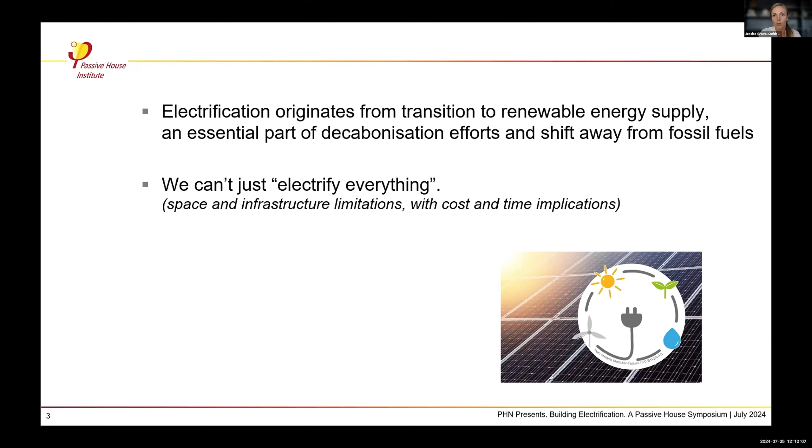So we had to talk about electrification, but more specifically, we had to talk about buildings and electrification. How does the trend for electrification influence building design? Or ask the other way around, what role do buildings play in this important journey of electrification?

There's always the building design side in terms of how much energy we need, what kind of systems we use—and there's the big trend towards heat pumps in this context. There's also the side of electricity and energy supply, which in the context of buildings is typically and most dominantly PV.

When I was preparing this presentation, I read one of the most recent newsletters from the blogger Lloyd Alter, and I couldn't have picked the words better, so I chose to use his quote. He says: if we're going to have a chance of electrifying everything and running on renewables, we really have to reduce demand and shave the peaks. Those are really the two crucial aspects it comes down to—crushing those peak loads, bringing them down, and reducing the need for electricity overall.

This is where Passive House and EnerPHit really come into play, because they address exactly these two topics: bringing down the peak loads and bringing down our general energy demand. I'm going to dive into a bit more detail on both, kicking off with reducing energy demand first.

The most obvious point here is that we have limitations in terms of space. How fast and how much renewable energy can we actually build up in order to provide the same energy currently provided through other resources, mainly fossil fuels? That's a large amount of energy. Building a completely new infrastructure to provide that through renewables and electricity has to be limited, has to be reduced, otherwise this becomes absolutely unfeasible.

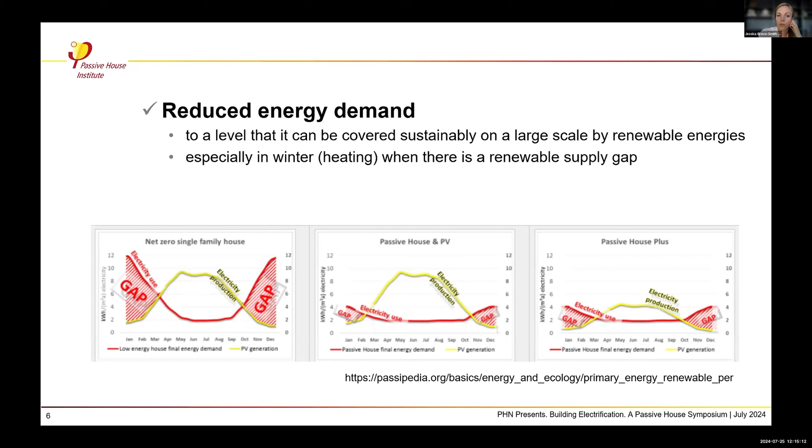So again, Passive House for new builds, or EnerPHit for retrofit, can really help with this, because they address bringing down the energy demand in winter, for example, for heating. They really, really bring that energy demand down.

So we can see, if I just get on my laser pointer, in the examples shown on this slide—on the left-hand side, it's just a typical net zero single family house. In red, we see the heating energy demand curve; in yellow, the production. So this is net zero, but we have that massive discrepancy between our supply and our demand.

Here we have the passive house example—you see how it really brings down that energy demand. With the same amount of PV, we're easily in a surplus; we can provide more to the grid and help cover some of those seasonal storage issues. Or if we have the same net zero goal, it means having to bring a lot less PV to the grid. The other topic to speak about is our peak loads.

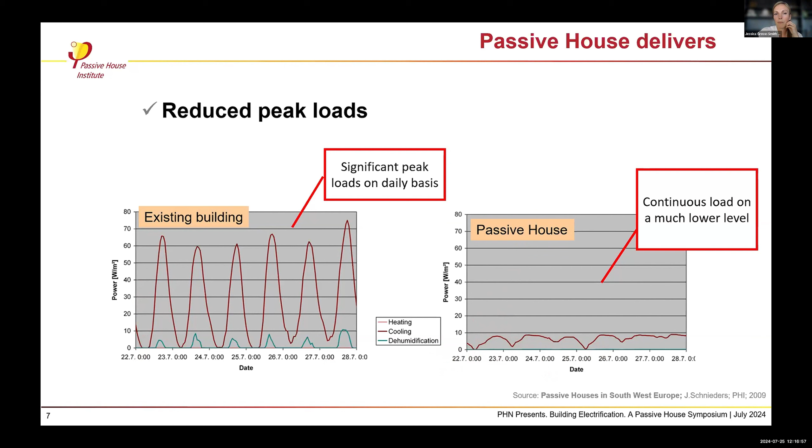There's an extra benefit that comes with this, which is really important to point out. Passive house buildings, energy efficient buildings, have much more inertia, right? They're much slower in a way to react. They're not so sensitive of having to get the right amount of heating or cooling at a specific time. So that gives them resilience.

So a really important aspect to all of this. It also means that we have much more flexibility in terms of actually using our buildings as storage as well, because it doesn't matter so much when we introduce the heat. It can be shifted by a few hours, maybe even a day, and still you're maintaining comfortable conditions within the building, which can really help to stabilize and run the grid.

So shifting gears a little bit, what I've spoken about so far is reducing our energy demand and reducing our peak loads. Both of those are fundamental and core parts of the passive house definition of what passive house has always been about, in addition to the building physics and comfort requirements. But there's a second and kind of extra tier to all of this.

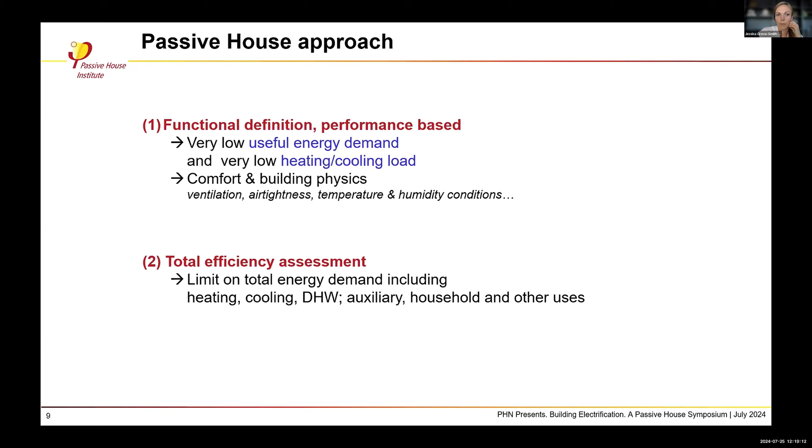And here it becomes a little bit tricky. This is where passive house has really developed a new solution to address the topic of electrification and renewable energy supply. Because the tricky question here is, what kind of indicator actually works well for that total energy assessment? Conventionally, nowadays, and in the past, we've become used to using indicators such as source energy, which is fossil fuel based, or CO2 equivalents, which are both valid. They both have their historical context. They're both really interesting factors, but neither of them address the topics of...

...electrified renewable energy grid. Neither of them incentivize in terms of we need to make sure we reduce our demand for renewables overall, and neither of them address the topics of seasonal mismatch or of peak loads. So an alternative is really needed in the passive house world, but also beyond, in terms of what tool can we use to guide our building design.

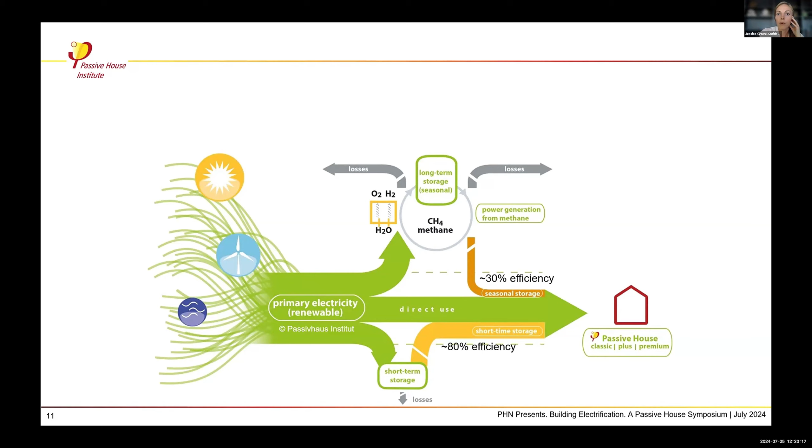And this is where PHI, a few years back, 2015 now, so almost 10 years ago, developed a scheme of PER. We call it Renewable Primary Energy, PER. And PER is, from its methodology, similar to kind of source site energy conversion, but fully in the context of a renewable energy supply.

The PER conversion factors we use convert from actual site energy by the building to the PER demand. They reflect how much renewable energy you'd have to feed into the grid to match your site energy demand on the building, taking into account that you can't avoid losses along the way, either through battery storage to cover a couple of hours or days, or longer-term storage for seasonal needs.

There are different technologies being discussed for this. I won't dive into the details of why we chose the methane solution shown here—it doesn't really matter, because overall the efficiency of these seasonal long-term storage solutions is only about 30%. So you're losing a lot of energy for anything that has to be stored for a long period of time.

So this is the PER scheme that we've developed as Passive House Institute. The idea is that you have weighting factors that give you an indication for your building design in terms of your amount of renewable energy—what is your sustainable use of renewable energy resources.

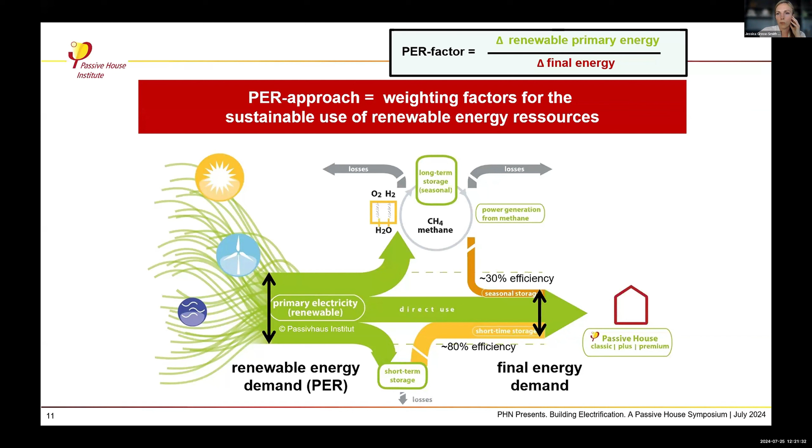It very quickly became apparent when we were doing the analysis that the actual timing between when the energy demand occurs and when renewable energies are available is the driving factor for all of this efficiency of providing electrification or providing renewable primary energy.

We did a lot of simulations worldwide for different building scenarios and different efficiency levels to derive these PER factors. In the end, what's been implemented is that we have different PER factors for different locations, depending on climate and renewable energy availability, but also different weighting factors for different uses of electricity. So your efficiency is going to be much worse for heating, where there's a huge mismatch between what's available and what you need, versus cooling, where quite often PV is available at the time you need it.

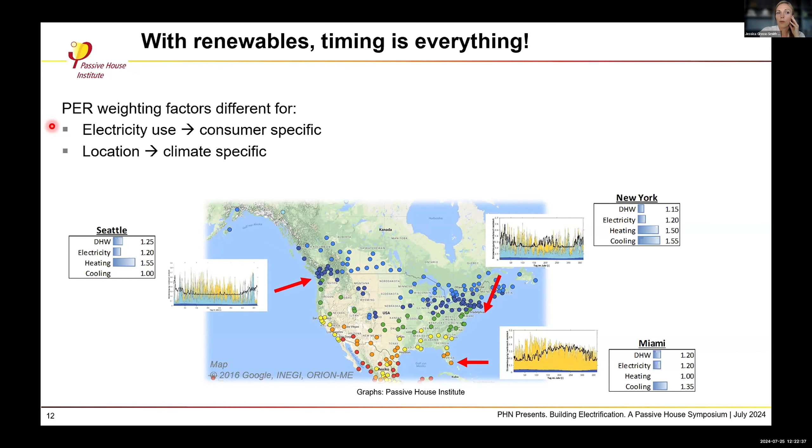So all of these factors are integrated into PHPP, the Passive House Planning Package, and they become part of the climatic boundary condition for your energy modeling—giving you a methodology for localized, regionalized electrification or decarbonization. How do I locally optimize my building to match up well with a renewable energy supply?

So far I've spoken about electricity in terms of PER, which is the main energy carrier for renewable energy supply, as explained, depending on climate and consumers. Obviously, in reality, not all buildings are going to electrify immediately, and we also have to look at how we rate other energies within the PER scheme. It's beyond the scope of this presentation, but I wanted to briefly show and point them out because it becomes relevant for the discussion of how PER guides design compared to existing source energy ratings.

Basically, in the PER scheme, we rate all energy carriers as if they were fully renewable. So gas, for example, becomes rated within the efficiency of it actually being power-to-gas—gas created originally from renewable electricity. I'm happy to answer more questions in the chat or afterwards about this.

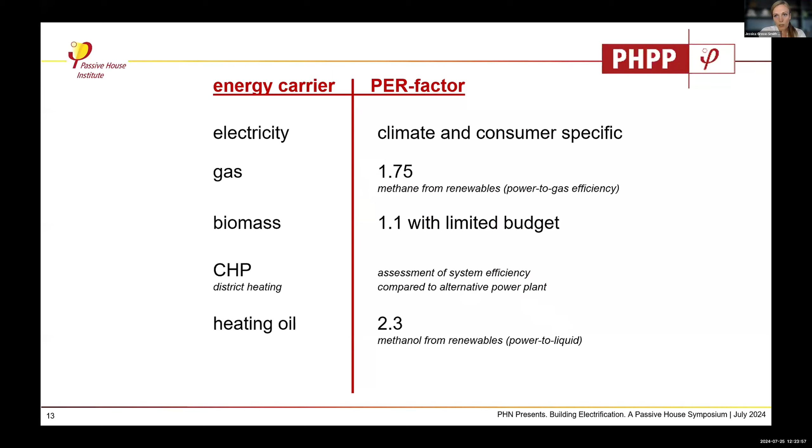I'm going to skip ahead in terms of time and actually dive more into the implications of what PER does and how it supports us in decisions about electrification.

What we see here is, in the context of the US and Canada, the source-site ratios taken from the Energy Star portfolio. You can see the factors are quite high for electricity grid purchase and quite low for fossil fuels typically used like natural gas or fuel oil. Whereas in the PER scheme, the factors for electricity vary depending on use and climate between 1 and 2, while the factors for gas and oil are much higher—1.75 for gas and 2.3 for oil.

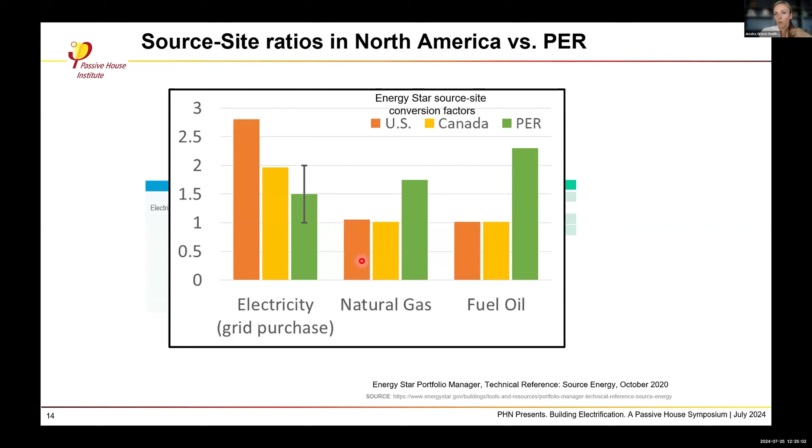This is the same information, but shown as a graph to make it visually easier to understand. Orange is for the US and light orange for Canada. You can see that in the PER scheme, electricity is rated much more favorably, whereas in the current source-to-site schemes, it's the fossil fuels that get encouraged and incentivized by these weighting factors.

So it encourages you away from the gas solutions, away from the fossil fuels, towards your electrical solutions, ideally heat pump solutions. That's what PER implies when you use it as part of your building design and choices for systems. PER is really important and applicable generally, and we'd like to see it pick up also outside of the passive house scheme.

To really make these aspects visible, and the importance of energy efficiency more integral of the whole building design processes. In terms of the passive house quality assurance, PER is applied in terms of the categorization of 3 certification tiers: Passive House Classic, the traditional one that we know, and then Plus and Premium, where the fundamental requirements are the same in terms of very low peak loads, very low energy demand. But on top of that, for the higher tiers, we're calling for an increased overall efficiency, so lower PER demand, and a certain amount of renewable energy generation.

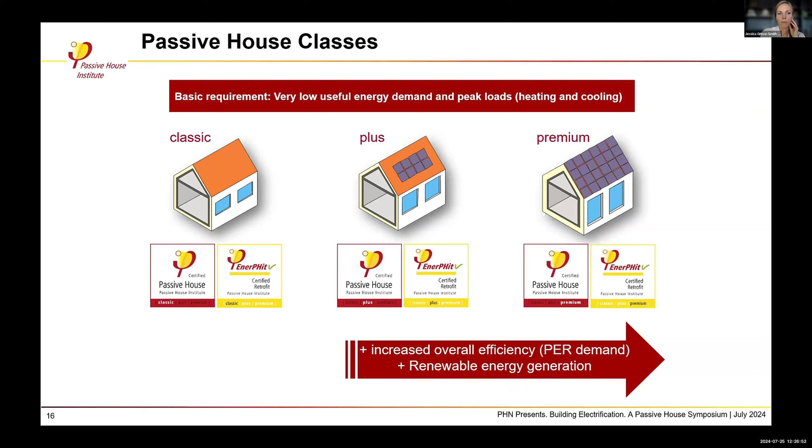Renewable energy generation is obviously the other side of this very same coin of electrification, and a very commonly used goal here is net zero. It's a simple and attractive concept. I get it, I understand it, but it can be very misleading. It ignores all of those aspects that I spoke about earlier regarding peak loads, regarding looking at seasonal storage and losses, and just leaves utilities to deal with these kind of problems.

Now, this is all a very big topic, and I realize this has been a very quick run-through, so I just wanted to point out a few resources to dig a little bit deeper and learn more about the PER scheme. The go-to to get started is Passipedia, and there's a landing page there for PER that'll take you through a lot of things I've spoken about, but also more in-depth information on how we develop PER and some more examples of how this gets implemented.

Not all passive house and EnerPHit projects nowadays are fully electrified, but it is certainly an increasing trend that we're seeing. We'll hear about some really exciting trends and some really great projects from the US context later today that I really look forward to. For those of you who are not yet familiar with our online passive house database, I encourage you to take a look.

It's a fantastic resource to get inspired from projects that have been implemented, and you can use this to find projects of most interest to you by using the filters, for example looking for Plus or Premium passive house or EnerPHit projects, or searching terms such as heat pump, which will point you toward projects that have implemented heat pump or electrified solutions.

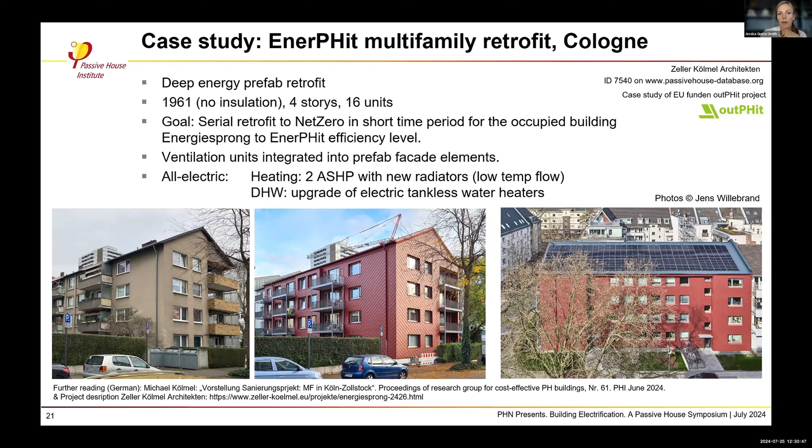The numbers show that they do achieve net zero overall over the course of the year, but only due to the really high efficiency levels to the Enerphit level that were implemented. It's a certified Passive House Plus.

As I mentioned, we approach that differently in the Passive House certification scheme. We don't do net zero. We don't try to match your absolute energy production with your demand, but we rate them independently.

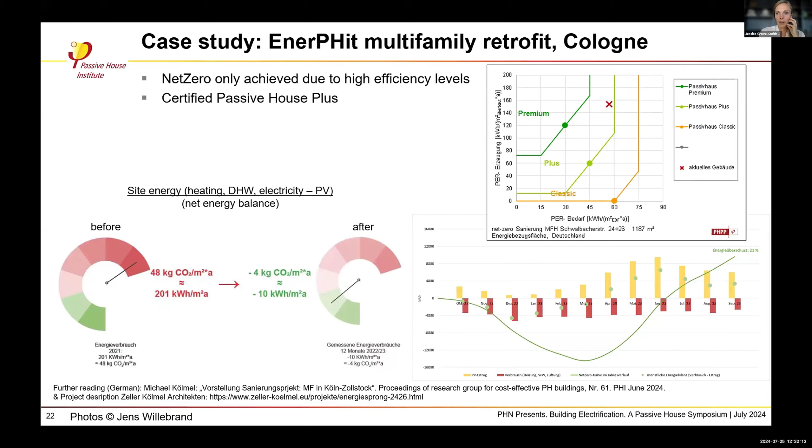There's a lot more to talk about, but that brings me to the end of my presentation. I'm excited to hand it over to the next speakers and learn about their projects. As a core kind of message and takeaway, I think I just wanted to highlight that energy efficiency is really an enabler, but more than that, it's a prerequisite for sustainable electrification. And Passive House and EnerPHit can really set us up and leverage those challenges and set us up for success.

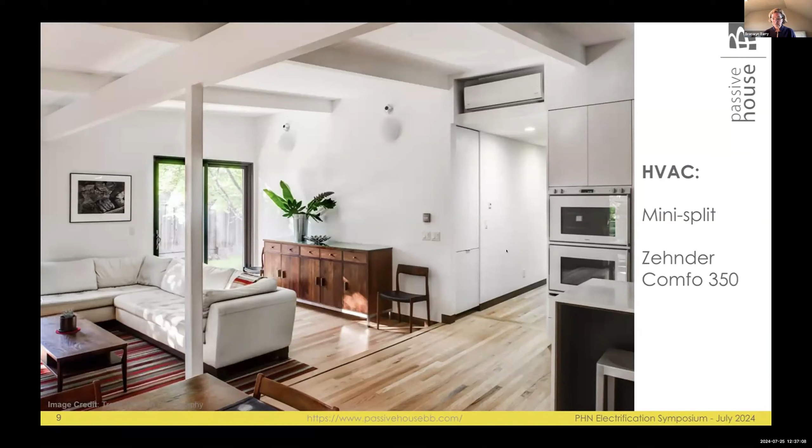For this project, remember, this is a wall-mounted mini split, just under 2,000 square foot home, heated and cooled with just that single split unit. Ventilation supply all through these two nozzles into the plenum living space.

This is an image where you can see we did still have a gas cooktop in this home, and the only reason we put it in was because the clients had already bought it before we got to them. They also had a gas water heater, which we reinstalled because it was still in good shape, with the caveat that it would be replaced at end of life with a heat pump water heater.

And I understand it has already been replaced. And finally, I'm going to catch up with the third project in Sunnyvale.

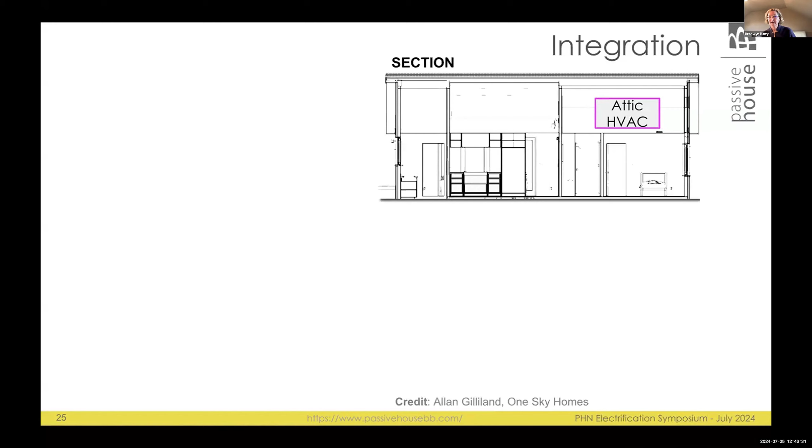In terms of the HVAC layout, again, Allan sort of went and used the same tricks that he'd figured out in Alamo, integrating the HRV and heat pump ducting to really simplify the mechanical system distribution layout.

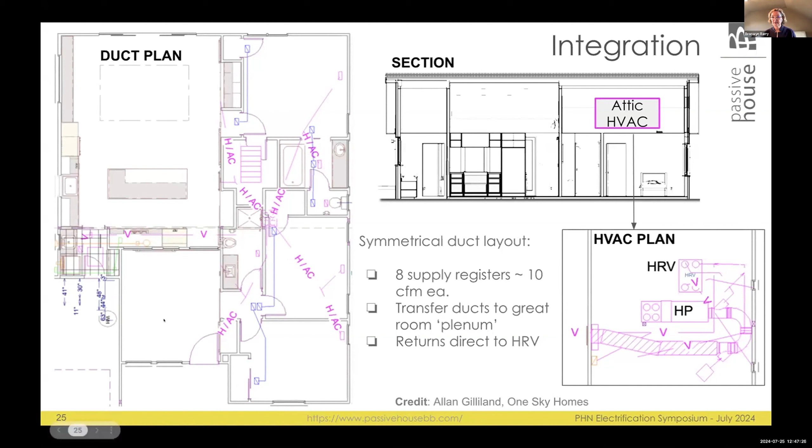You can see again in the duct plan, this was the vaulted spaces here, the living room spaces. Our HVAC is sitting in the attic above the bedroom spaces here, and 8 supply registers, very even, again, balanced layout. You can see jump ducts, making sure that the air pressure balance across these rooms is also kept balanced, and that the transfer to this living space plenum area can be effective and happen.

Again, supporting what Jessica mentioned in the definition of net zero, which has lots of fuzzy opportunities to be interpreted creatively, shall we say.

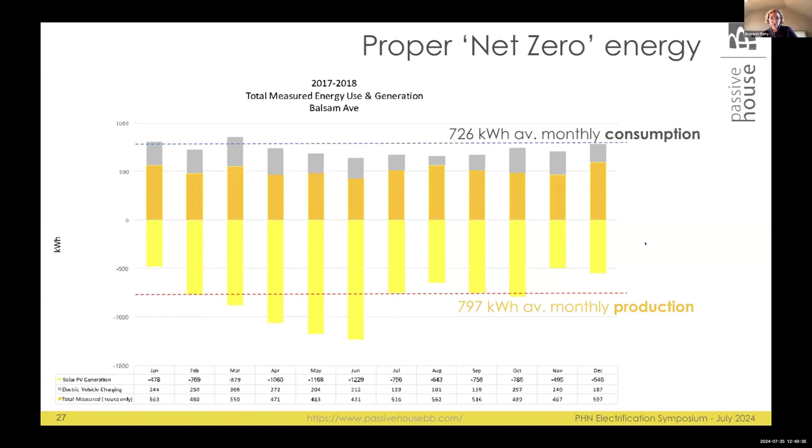So now that I've told you what I really, really want, like the Spice Girls, I'm going to show you that passive house in California is still an absolute no-brainer. It crushes the heating and cooling loads in all the climate zones that matter.

Part of this other CPUC report confirmed that my 2 passive house projects, which I presented on here, I was able to supply hourly monitoring data to them for over a 2-year period for both of these projects, which was then converted into a comparison between 5 Zero Net Energy homes in California in similar climate zones. So a pretty close comparison between passive house and not Title 24, but better than Title 24, so ZNE.

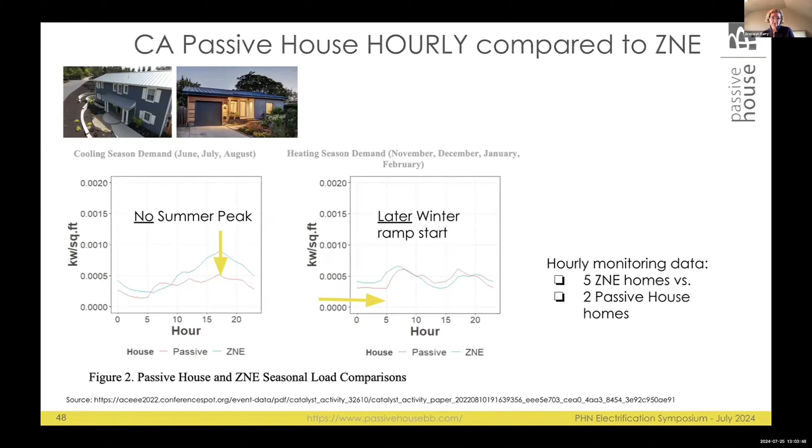Winter, there was definitely an improvement, a shift of the peak ramp-up rate of when passive house started to kick in. But in terms of winter, not significant ramp-ups compared to the ZNE homes, which were clearly doing a pretty decent job of keeping winter loads low.

I'm going to show you a little bit of my own home. I'm a passive house architect, been doing all-electric passive house projects since 2008. So I'm going to tell you a little bit about the why, how, what, and where, with the example of my Passive House Plus project.

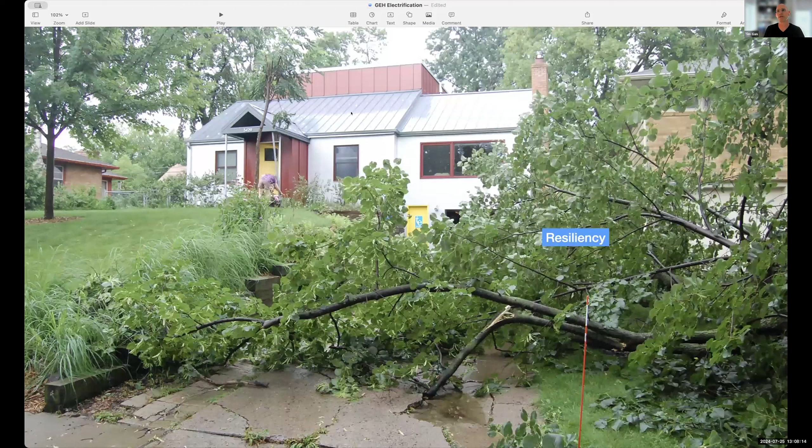Motivation: why would anybody decide to do this beyond the societal reasons we've already heard about today? For us as a family, it was really important that we do our part on climate change, so we didn't want to be part of the problem. Comfort, huge—we live in Minnesota, we have very cold winters, and code-compliant construction doesn't provide a lot of comfort. It's drafty, we have radiant heat loss, so we wanted out of that. And also resiliency—we have changing climate, more severe weather events, so we wanted to be in a building that can weather the storm, so to speak. The passive house is a great approach for that.

So we decided to build Minneapolis's first Passive House Plus, and I'm going to run you through how that all went. So why did we decide to electrify everything?

Well, it's climate neutral, so that answered our first request. It's also a universal fuel, something we need for everything, so it's easy to go with electricity because you can power just about any device these days off of it. We can make it on site—we have solar on the roof, which I'll show you in a minute. We can also build a backup and storage solution around it.

The heat pump efficiency was of interest to us. So the mechanical systems, as Bronwyn pointed out, there's efficiency here to be had. We eliminated all combustion from the home—there's reduced fire risk and better indoor air quality for it. We didn't have to pay for gas, plumbing, and infrastructure, so that's not even in the building at all. And for me as a geek, there's simple math here to track my consumption and generation—it's all kilowatt hours. That's another good reason to go with electricity.

A quick picture of our context here: we did a tear-down rebuild in Northeast Minneapolis, US climate zone 6, very cold, 8,000 heating degree days, with a design temperature of -31°C or -24°F. So my main concern here is heating, although we do have a cooling load just as well.

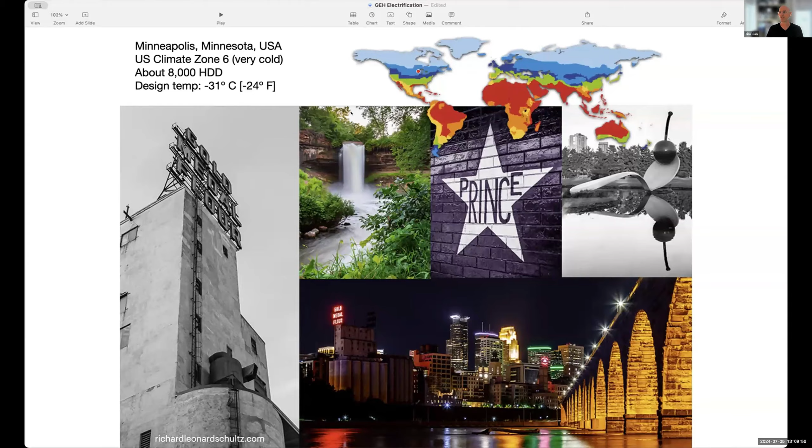Passive House Plus, as I talked about earlier, means we have renewable energy in the mix, and we did track the PER values. Won't do a deep dive on that today—hopefully we'll have another presentation someday where we can expand on some of these subjects.

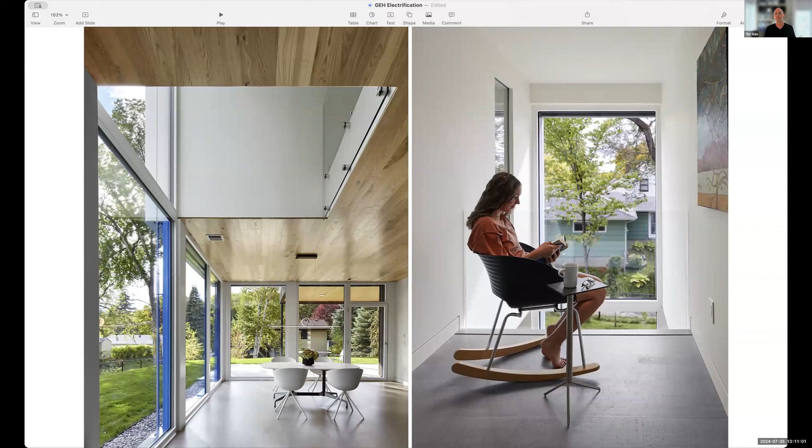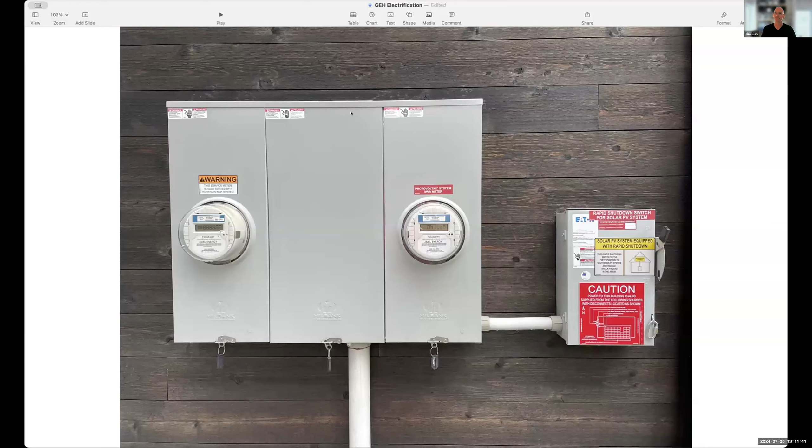Just a couple of impressions of the infrastructure. One thing that changes in this scenario is that we have the main service coming into the garage, and then the house has a sub panel off of that. I'll talk more about why we did that.

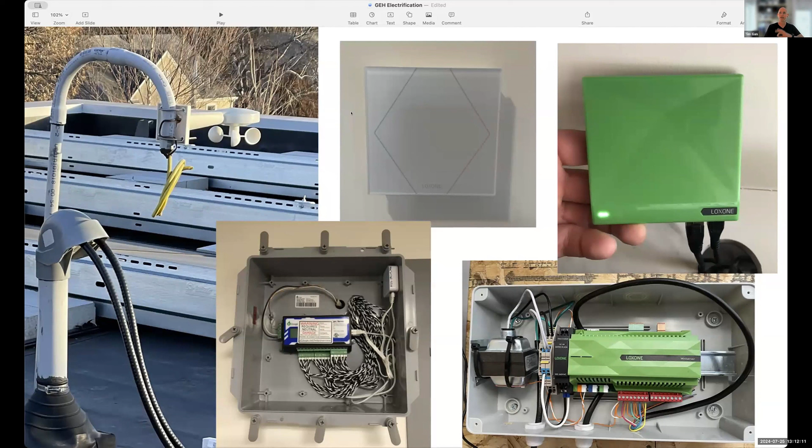We also monitor this, and that's important because I wanted to bring you some numbers today. We look at temperature, humidity, weather, indoor air quality. The whole thing is basically instrumented, and you don't have to do that, but for somebody in my profession that makes sense because we can learn from that. Here's some imagery showing some of the equipment we use for that.

So let's talk about the process real quick. What are the things we did to be able to do an all-electric passive house? The first thing is we rotated the building on our block 90 degrees from the building that was there to make the broadside face south. That makes the building a passive solar collector. That's a really important part of the strategy.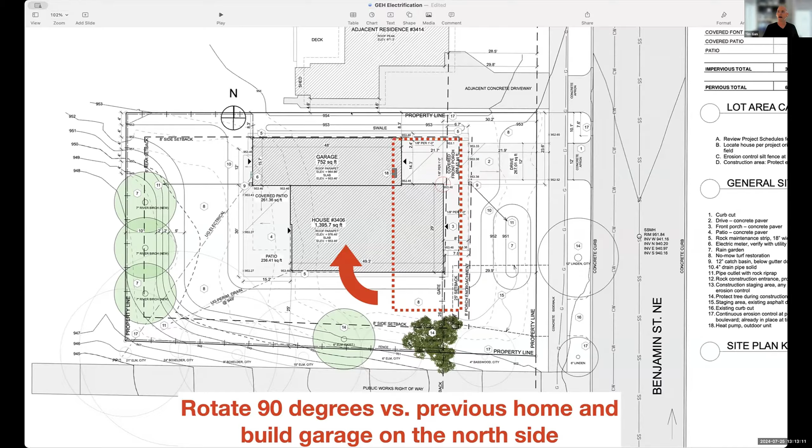Secondly, we made it a certified passive house. So the construction methodology, the R values, air tightness are all at the passive house level. This brings the peak heat loads and the overall demand down and enables the all-electric fueling of the building.

The next thing we did is we basically erected the back of the garage first. And as soon as humanly possible, we put the electric service in, subscribed to wind power, and we effectively built the entire building off of wind energy right out of the gates, trying to avoid any kind of generator or polluting equipment even in the use of construction. This also extended to our construction methodologies, but again, I won't be able to do a deep dive on that today.

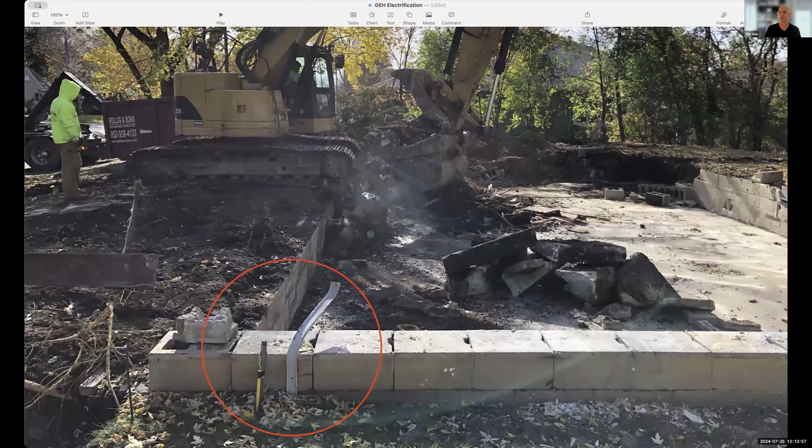With the demo of the old house, we removed the gas service. You can see the remnants of it right here. That was a bit of an upset for the gas company because they can't imagine a building without a gas connection in Minneapolis, Minnesota. And they also had no protocol for removing the service, which means that thing just got abandoned on my site. So somebody cut through it with that shovel, and the remnants of that are buried somewhere in my front yard, and that's where that story ends.

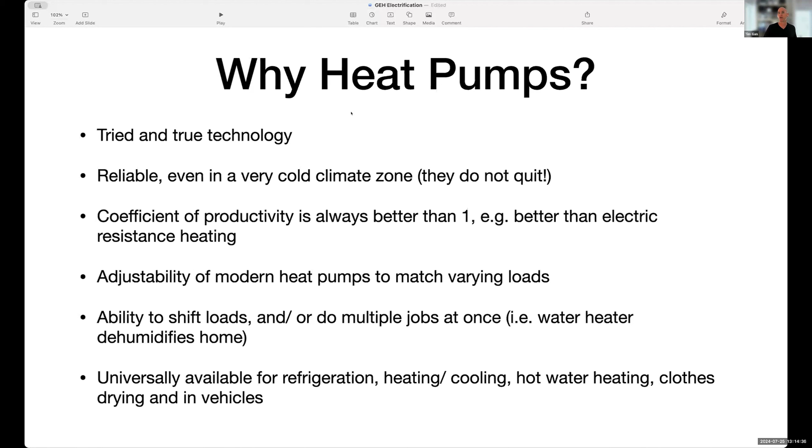Then we went for solar. We installed that within the first year on our roof, and with that we were able to go essentially all electric, and then install a bunch of heat pumps.

You don't have to read these slides here, I'll give you some pictures. One of the benefits of going all electric is we can leverage this technology, which isn't particularly new if you think about it. In refrigerators we've had it for decades. In my home, you find it in the refrigeration, the dryer, the heating and cooling system, that's house and garage, we keep our garage frost-free. You find it in the hot water heater you can see there on the right-hand side in that picture. And then also in the vehicles these days - they are also efficiently heated and cooled with a heat pump.

The reason we use heat pumps is it's a tried and true technology. It's been around the block. It is very reliable, at least in my experience. I've used these in projects since 2008. They don't quit, they work really well, running through the cold periods of the year. There's a lot of myth that they turn off at some temperature - that is simply not true. And they always run at an efficiency better than one, meaning they always beat direct electric heat. So there is a benefit to putting them in over electric strip heating or in-floor heating or something like that.

Also, modern heat pumps are very good at adjusting to varying loads. This goes back to where Bronwyn left off. Our trades are not very well trained, so sizing of equipment and even availability of small equipment is not great. So sometimes we have to work with what we can get.

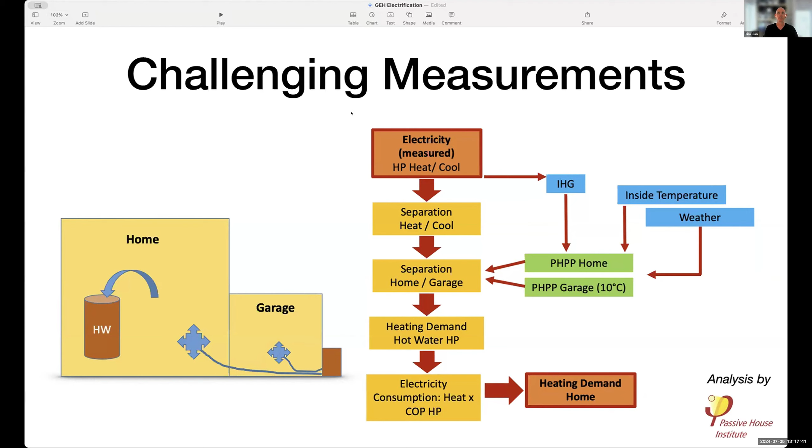And then, of course, I have a hot water heat pump inside the home that uses warm air from the house to make hot water. So we have another heat pump sucking on the first heat pump, and dividing that is somewhat of a challenge. So just know that if you want to monitor and be specific about it, that takes a little bit of work. And in the PHPP, for passive house practitioners, that's also still a bit challenging to model.

So let's get into some of the data just to show you how this all works. I built the house in 2020, or finished it in 2020, so we've been in it about 4 years now. I have 3 years worth of data that are relevant and good, and you can see that here.

So the short of it is that for the most part, what I do in the house and the garage, we're at an annual net zero. That doesn't mean we're net zero on any given day — we see that fluctuate a little bit. So this is something we've learned, but generally it works as we intended. We can cover some of our electric driving also from the roof, but not all of it, and we can talk about that more.

Cost is something we always get asked about. Cost is relative — the cost of a kilowatt hour of electricity is different in different places, and net metering works differently. But for us specifically, on the right-hand side of that column, I'm showing you what that is. In the first year, we ended up paying $73. In the second year, we made $266, and in the third, we made $424. So I effectively do not have a utility bill at this point, and I should note that includes all the electricity or energy consumed on my site. There's no cop-out, no other system here.

All of the energy consumed is either off my roof or wind power. And then last year, my electricity company switched the contract to solar and wind power combined, so that makes no difference — it's a climate neutral site.

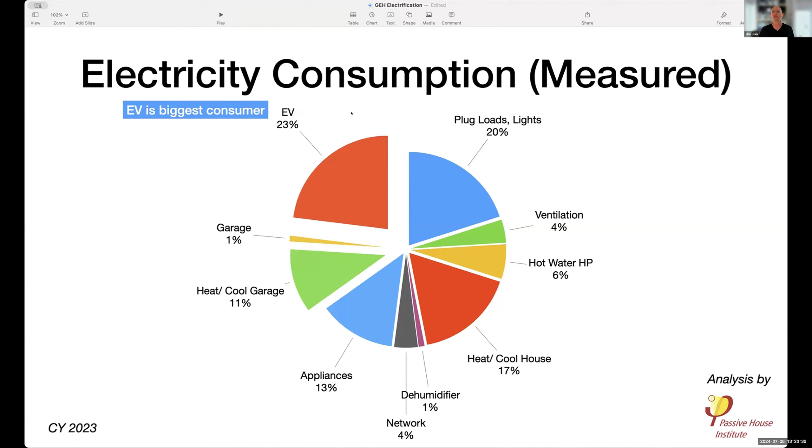Here's a quick graph based on the measured numbers of how the loads in the home lay out. We're just starting to dig into this in comparison to what the PHPP told us was going to be consumed. The good news is it's very close—the heating, cooling, and hot water, some of the bigger consumers, are right in line with what was predicted.

We also see that some stuff is different. For instance, now that we work from home, we run a commercial grade network and a little server, so we have a significant amount of load there for networking equipment that the average consumer may not have in their house.

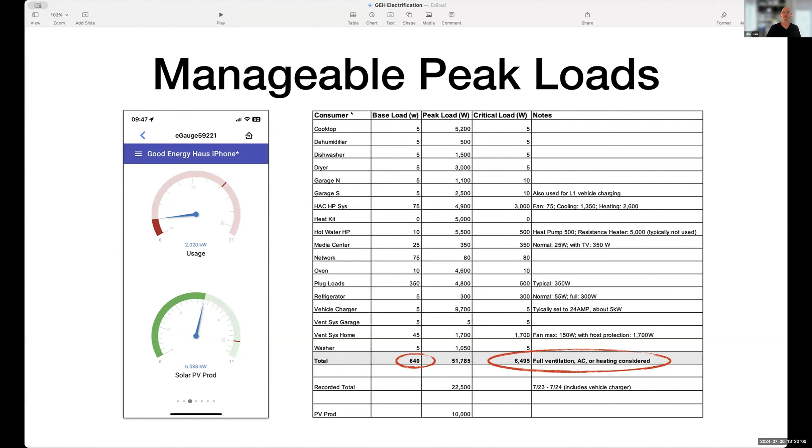Another thing we've learned from our house is that the peak loads are really manageable, as was already alluded to earlier. I did a quick calc because we're in the process of looking at a battery backup. Our critical loads typically amount to only 6,500 watts, including basically full heating and cooling of the house happening, so we wouldn't have to scale back on anything. We could continue through an outage at that load with hot water, heating and cooling still going—though a passive house can coast for a while, so it's maybe not even necessary. Also, our base load is fairly low, so both of those loads are very well managed by the house being such a low consumer.

Considerations based on that: the electrical loads and electricity demand in a passive house is very different than in conventional buildings. Heating and cooling are no longer the biggest loads, perhaps not even the biggest demand over the course of the year. Vehicle charging is becoming the new peak load, at least in a single family home setting, if that's how you do your transport.

So for us going forward, we're also looking at an uninterrupted power supply, in anticipation of time-of-use billing that our state is probably going to get within the next 3 years, and then our solar rewards will run out. We want more resilience and cash flow optimization, and in an all-electric building, it's perfect—you're already set up for that. So the technology of plugging in a battery backup system becomes possible and relatively simple to do.

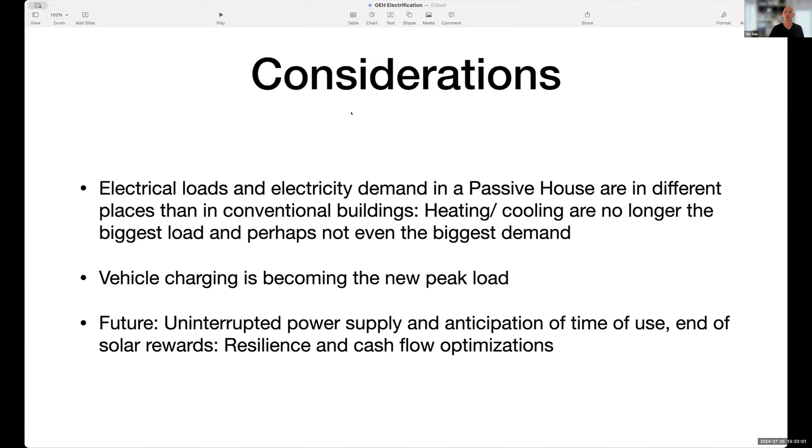The gas disconnect I talked about—the company wasn't really prepared for that. That didn't create any problems, but it is maybe a challenge because I got a bunch of stupid questions from them that wasted my time.

Grid regulation is a challenge a little bit. My power company was trying to tell me how many solar panels I can put up and how that all works—that's not always what you want in a design. So you've got to work with them through that, especially in new construction here in Minnesota, which can be a little challenging. The PV system size, the system setup, the batteries, the rewards programs can all sort of reach into your design ideas and targets. Just know that as a challenge you might have to deal with when you go all electric.

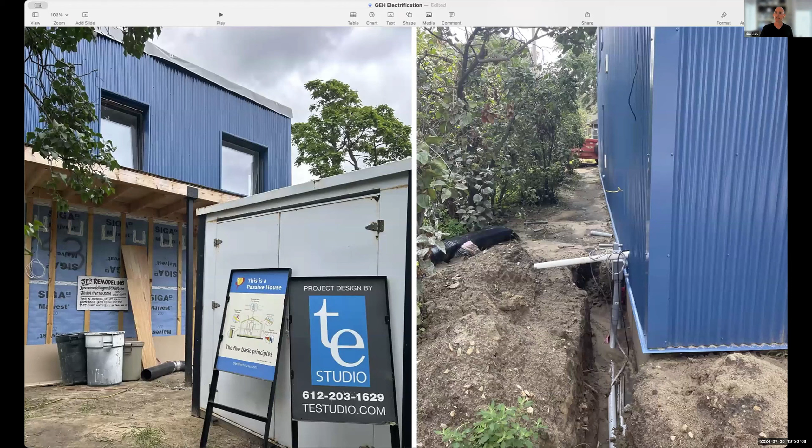Some of the successes, real quick here. So here's a new project that's just about to wrap up that I worked on. The electrification just works with passive house, at least in our climate zone here. You don't need any cop outs. We don't need a fireplace. We don't need a gas hookup that we're hiding somewhere. It's all electric. You can see that here on the right-hand side, there's the little hookup coming into that house. All loads are accounted for, and we're doing it again and again in our extreme climate zones.

My home has been just about net zero since move-in, but not on any given day. Just know that too. For that, we would have to do something with batteries and or the grid. Even some EV charging we can squeeze in from the roof. The all-electric passive house is super easy to live with, but it's still affected by power outages. So again, we would have to have some kind of a backup for that.

Low consumption and incentive programs mean zero energy bill for us. And we have that small surplus every year that helps chip away at the original cost of our PV system. It'll cover about a third of the system cost over 10 years. That's the runtime of the program. And then as I showed, passive house puts a cap on peak loads. It's much more compatible with the grid capacity than business as usual.

All right, and then maybe last, the opportunities, some of the things that I'm working on and I've encountered. If we go all electric, we can do different kinds of wiring. I showed you how the panels are laid out differently, perhaps in my house and in my designs, and they are in different locations. We're also getting into DC wiring, not just AC. So if we have DC production on the roof, for instance, we can take that right off and connect a vehicle charger to that. Also with on-site storage, there are DC systems and AC coupled systems. Can't do a deep dive on that, but those are opportunities. We get to get into the sort of RV and off-grid realm much more once we're all electric.

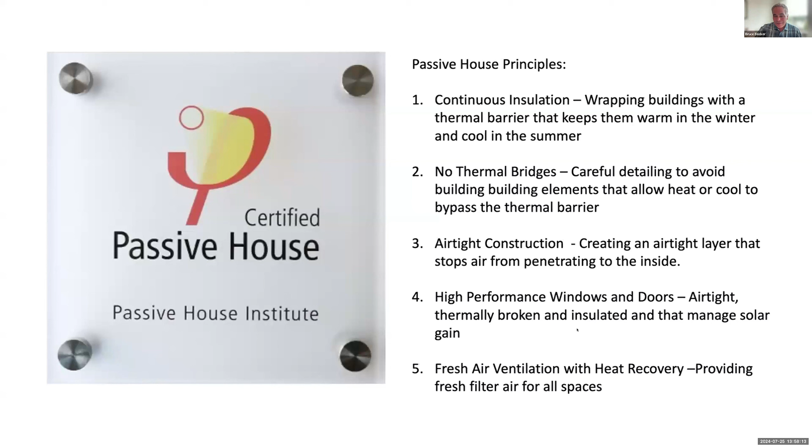And then we have fresh air ventilation with heat recovery. We've got two big Swegon gold ERVs up on our top floor with continuous filtered air, which really came in handy when we had all that smoke coming down from Canada. We had the freshest air in the county inside Hotel Marcel.

We'll talk about LEED Platinum, but I think it's a great set of measures to make sure you're being sensitive to a whole range of environmental and sustainability issues. And there was certainly no conflict between doing this and meeting the Passive House standards.

So again, our solution to address this dire climate crisis we're in is to reduce our energy requirements as much as possible. Passive House is really the primary way to do that. Obviously, recycling the whole existing building eliminates almost all the upfront carbon for a commercial building, so that may be the single most environmentally sustainable thing we've done - reuse this amazing building.

There are all kinds of smaller challenges we address to reduce our energy use. A lot of it relies on heat pumps, but also control systems and programming. We have electric systems other hotels haven't tried before - an all-electric kitchen with induction ranges, an all-electric laundry. We recently replaced our energy hogs, which were resistance electric dryers, with heat pump dryers.

We have the first air source heat pump made for commercial buildings by Mitsubishi for domestic hot water, what they call the Heat2O. We've also electrified our transportation system - we have an electric shuttle bus, 24 car chargers, and we try to make the power on site.

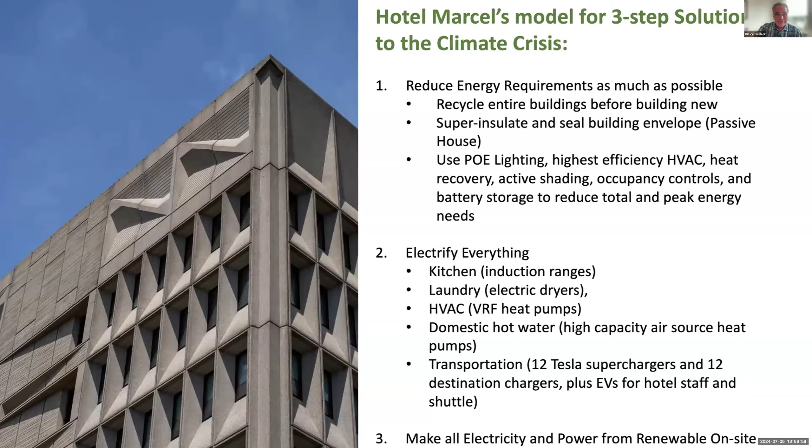I think people are remarking that, gee, this is the most energy efficient hotel, but it's also one of the most beautiful hotels. Sometimes there's a perception that an energy efficient building involves some compromise in comfort, or that you might put a sweater on, or it's not quite as enjoyable. But I think it's the opposite.

It's consistent temperature everywhere. In the room, we have the Mitsubishi VRFs right inside the door, which reduces the amount of ductwork we have. But it's the exact same temperature right at the window as it is when you enter.

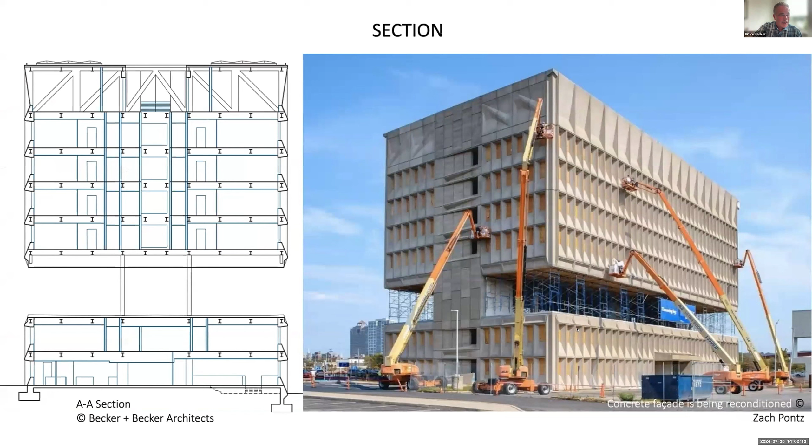So we cleaned the building. Here you see the cross section. It's a remarkable building because it's missing the 3rd and 4th floors, which actually creates a little more perimeter to insulate. But the facade was really well suited because all the windows are inset about 30 inches, so we get this great passive shading in the summer and solar gain in the winter when it's helpful.

Here you can see the beautiful precast panels, which provide that passive design.

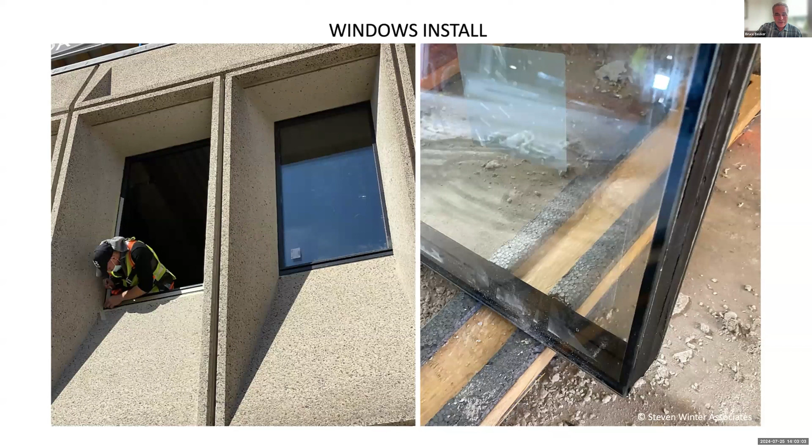We worked closely with Dylan's group, Steven Winter Associates, to come up with a plan for insulating the inside of the building. They did a lot of modeling for us, and we came up with a system of closed cell foam and open cell foam, even using some aerogel insulation and tape to create a passive house compliant building envelope. And then we have windows from a company called Klar, made in Poland with really high performance glass. These are a great investment because they really do a good job with the building envelope.

As I mentioned, all of the heat pumps are in that space, the vestibule as you come in, the door to the hotel room, adjacent to the bathrooms in the ceiling. And these are ducted from the fresh air that's filtered in the ERVs up on the 9th floor.

And here you see a screenshot of what we are achieving with the Swegon ERV, the energy recovery ventilator, where you can have outdoor air at 34 degrees, and just by passing through this heat recovery wheel, the temperature goes up to 52 degrees. So the heat pumps in the rooms don't really have to work nearly as hard. That's a big part of our energy efficiency.

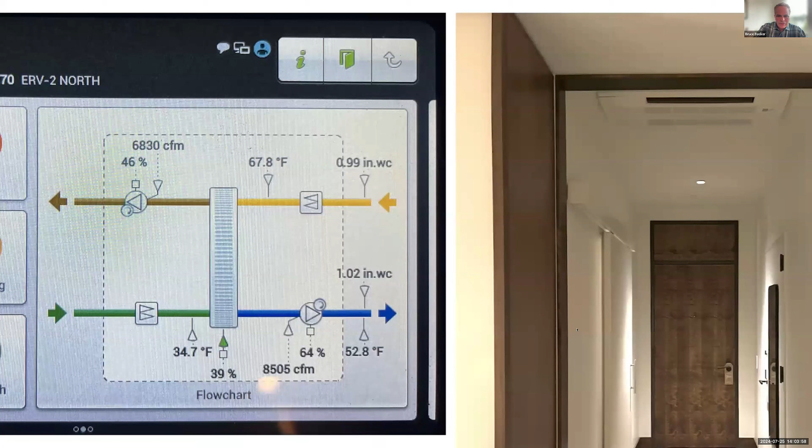We also use the power over Ethernet system, which Sinclair Digital in Fort Wayne helped us design and install. So we have more convenient touch screens, so you can set your thermostat. There's preset lighting scenes and control your temperature, all with the touch screen as you enter. And then there's also some buttons at the bedside for lighting and shade control.

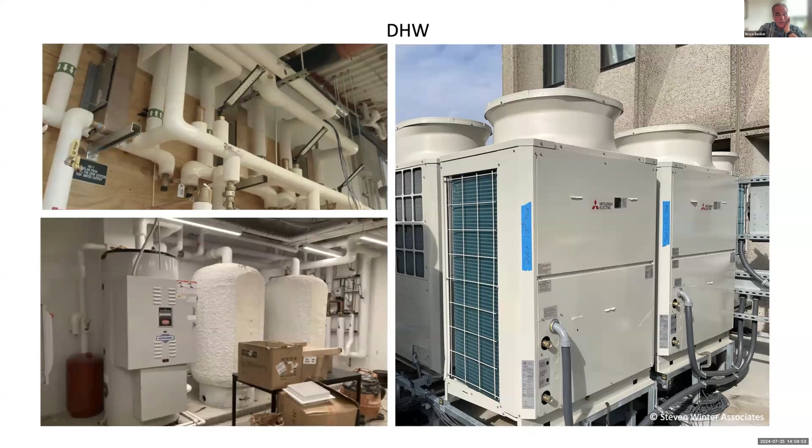Here are the Mitsubishi Heat2O heat pumps, which look like the other outdoor condensers. And then we have 2 hot water plants. We've never had a single issue with them. They work beautifully, and I think economically they are less costly to operate than a gas hot water heater. But these didn't exist - we got the first ones in the country, and now they're being put in everywhere.

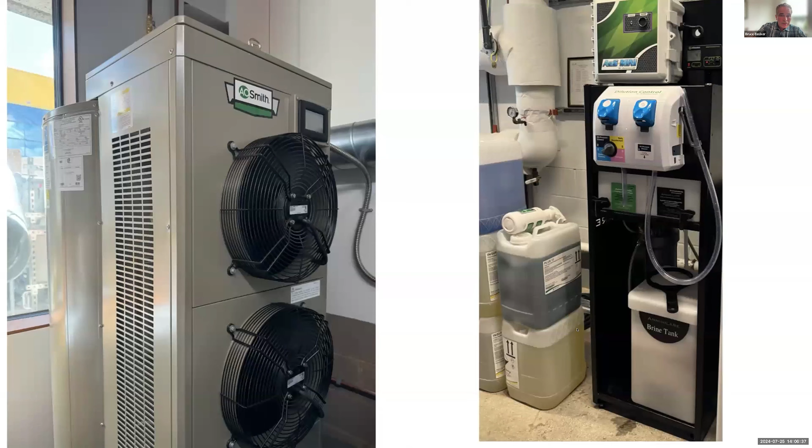One thing we did that was innovative is in the room, because these are not ducted, we put an air source heat pump hot water heater in the corner of the laundry room because the room was getting a little hot from the heat pump dryers. Originally, the dryer sat in an outdoor plenum, but by putting this here, we're able to cool the laundry room and also make the hot water for the washing machines with the same energy, just moving it from one place to the other. So we're continuing to innovate and use the hotel as a laboratory.

We're even making our own cleaning chemicals now with this new system instead of having to buy all the chemicals and have them shipped in plastic bottles. And we're looking for other things - we're also looking to try to add more solar. We're looking at maybe even a wind turbine, because right now we're only producing about a third of the energy, and our goal is to produce 100%.

So we look at this, and this is a day in the summer where we were making more energy than we were using, but this is an atypical day.

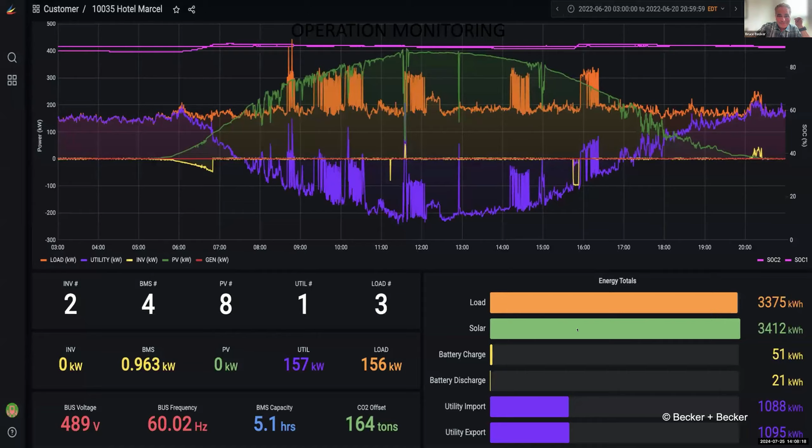So we have 12 Tesla superchargers. We also have 12 level 2 chargers for overnight guests, which brings in a little more business and is also a revenue source for us.

We also have an all-electric van that was converted by Maxwell Vehicles, so we can pick up people at the train station or drop them off at Yale or the hospital, without burning any fossil fuels. These are all very easily replicable strategies for hotels.

And then we're always trying to layer on things. I think the solution is actually to have fewer vehicles. So we now have bikes, and we're going to get some e-bikes for our guests to use.

This shows how we are performing relative to other hotels. There's a really good database that New York City has done, collecting data based on actual bills. You can see hotels are really the worst performing building type in New York City, with energy EUIs averaging 112.

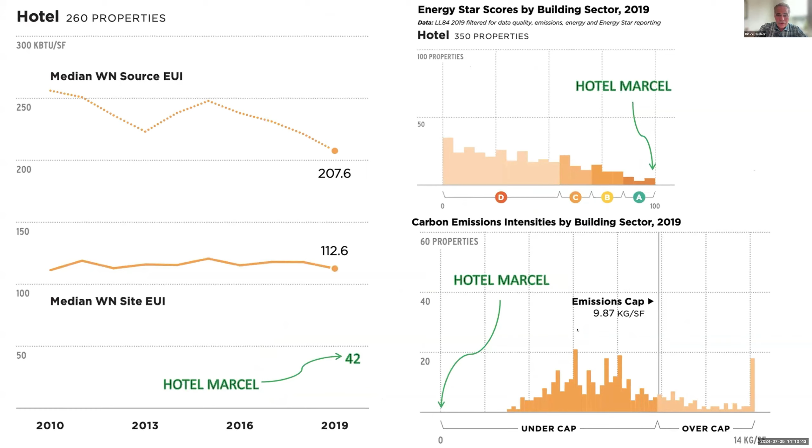So we're sort of proud that we've come up with a model that's replicable, that other hotels can follow, and there are a lot of hotel companies that are desperate to do this. All the major hotel companies have pledged to reduce their emissions in fossil fuels by 2030.

Little known secret is they're measuring them, but they're actually going up. So I think you're going to suddenly see a realization that if they just do what they've been doing without incentivizing or penalizing folks using fossil fuels, there's going to be a pretty radical change soon.

And then the other thing I sometimes talk to folks about is what this does in terms of our fossil fuel emissions. Cornell has a database of all the hotels in the world, and you can look at what's typical in terms of fossil fuel emissions. If we had built this as a conventional hotel in Connecticut, it would be producing 715 metric tons of carbon pollution every year.

If you go to the EPA's website, you can put that in and it'll give you the equivalents. The most striking thing for me is that's the amount of carbon you'd need 846 acres of US mature forest to absorb every year. So building a new hotel conventionally has the same effect on our climate crisis as clear cutting over a square mile of mature forest.

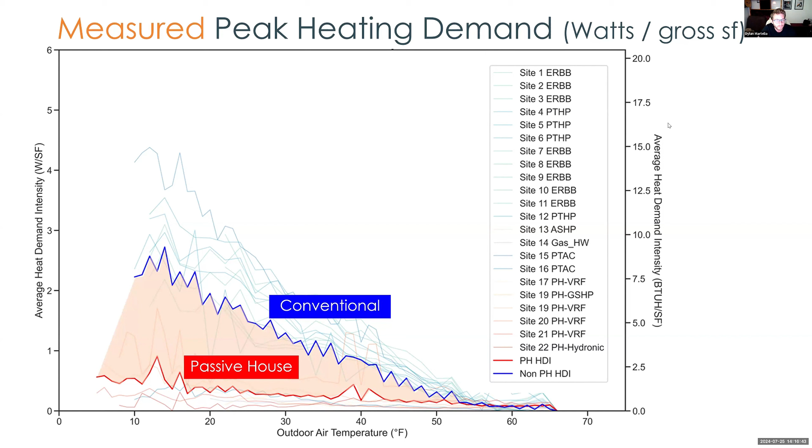So we also have some site EUI - this is energy use intensity, the common metric to look at whole building energy consumption per gross square foot on an annual basis.

And you can see we have here about 7 projects, all in New York City except for one, which is actually the lowest energy user - a multifamily senior housing building in New Haven, Connecticut, which is actually a retrofit of an existing historic building. Also, I think it went for historic tax credits, so really exciting stuff on the retrofit front.

All the other buildings are new construction here. But you can see we're getting results showing Passive House buildings with, again, large scale - 272,000 gross square feet, 139,000 gross square feet, 113,000 gross square feet. These large scale, high rise multifamily buildings are coming in the low to mid 30s for a site EUI, and we see a trend building.

The couple outliers there, particularly the 50.1, is one that is the smallest building in this data set, but it's also a building that was one of the earlier projects, and it actually had gas heat in it. So we suspect that's related to some of why the energy use is a little bit higher there.

But nonetheless, we see that Passive House is working and really bringing down EUIs, especially when you compare this to some benchmarks and some conventional comps that we have, which are the blue bars.

So the dark blue bars are multifamily buildings on average, both with vintages before 2003, which has a site EUI on average of 85, and post 2003, when there were some more significant energy code updates, of 73. So when you compare the passive house EUIs in the mid to low 30s compared with those benchmarks, you're seeing about a 50% reduction in energy use, which is really, really exciting.

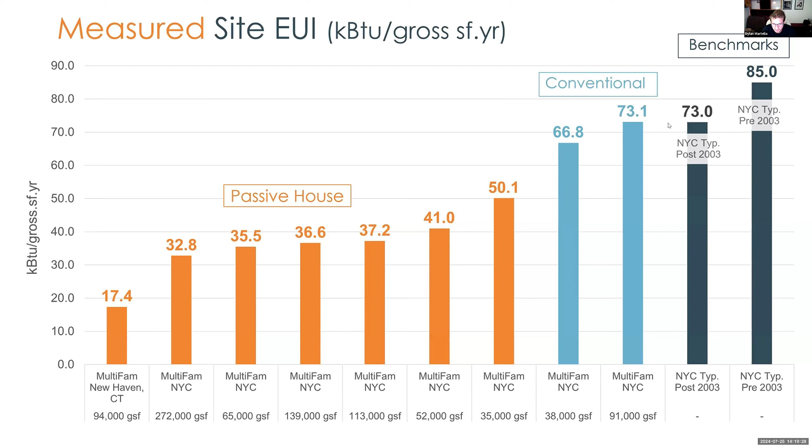So what we're getting at here is energy use reductions in these passive house buildings upwards of 50%. If you told me that when I started this journey into the passive house world 8 years ago, I would have been extremely excited to hear that. And it's really inspiring to see.

Now, these buildings have gas-fired boilers for domestic hot water, which on average, maybe at best, get an annual average COP of 0.95. You know, we are entering a world here where electrification, particularly of domestic hot water, is going to start being more common. So what if we had a heat pump for domestic hot water on these buildings?

What could we expect? You know, on average, even a conservative estimate of 1.5 for a COP for domestic hot water of this electric system, maybe somewhere between 1.5 and 2 on average. We could see the site EUIs in these buildings come down another 10 to 20%, so potentially even get below the 30 range on average.

That's exciting. That's real progress, and I think this is something that as we start to get more data, we're really going to continue to learn and continue to grow. But I think we're also going to continue to see results, and that's what we're seeing so far.

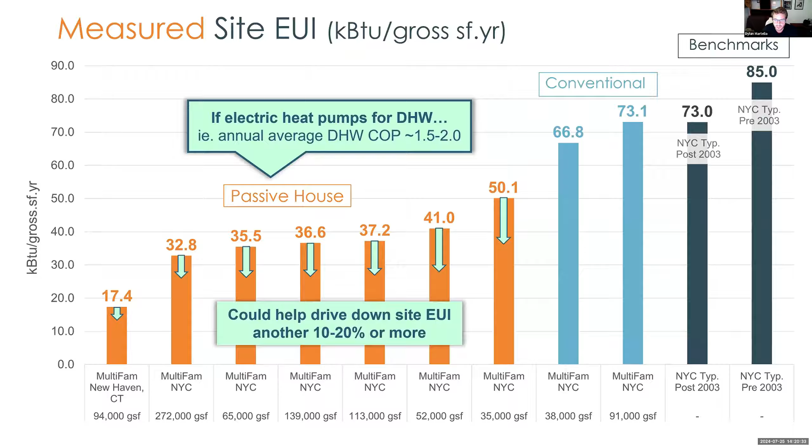So how do we actually get there, and how do we do this efficiently? I want to talk about particularly domestic hot water. This is the biggest piece of the pie in multifamily buildings right now with regards to energy consumption.

You know, we've solved the space heating problem. Passive House does a really good job at smashing those heating loads down. Space cooling right now, from what we can tell, is not a major load. It's very important, but it's not a major load in these buildings. Domestic hot water is the specific piece of the pie that we really need to focus in on.

So I want to highlight some technical challenges, but also solutions and things to think about, and how to help reduce these loads in these large scale buildings.

So first, with any domestic hot water discussion, it's helpful to set the stage with regards to a central system versus a decentral system. And by decentral, I'm talking about really in-unit systems. So that's what I'm going to focus on here first.

So one, I don't want to call this a misconception, but it's something that I think can get forgotten or not treated with enough consideration. And that's that unitized heat pump water heaters are not the same thing as electric resistance water heaters. You can't just take one of these tanked water heaters and stick them in a closet and expect it to run well. You have to understand that it's a heat pump.

It creates cold air, and it needs air to make heat. And the output of that process is cold air. And if you have cold air being dumped into a closet that doesn't have enough free air or enough ventilation air, the heat pump water heater will turn into an electric resistance heater. And I'm not saying this in theory — in practice, we see this happen all the time on operational projects that don't put careful thought and consideration into the design of these heat pump water heaters.

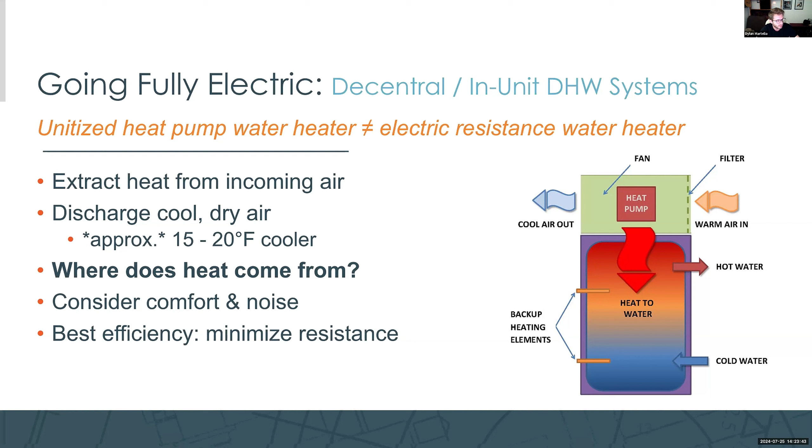So the way to maximize efficiency in these units is to minimize resistance. Really the key to minimize resistance here is to give these heat pump water heaters enough free air volume. They need air to breathe and to not freeze out the space they're working in. So conventionally, in a lot of single family homes, we see these work very well in basements where you have a lot of free air and you're not necessarily worried about the coldness of the discharge air as much. However, obviously in most multifamily buildings, most apartments, we don't have basements to work with.

So how do we deal with this? Really considering all these factors, this is a diagram of just a simple residential apartment with a mechanical closet that you might see a heat pump water heater in. Now, how do we do this efficiently?

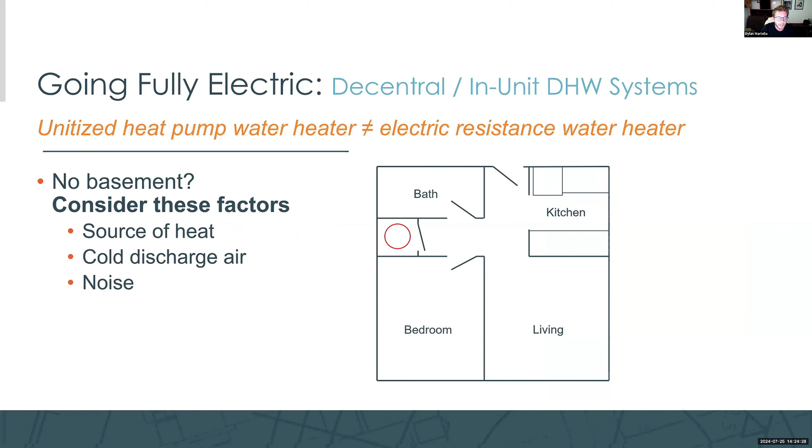Some of the do's, though: ducting the intake or return, at least one of these at a minimum, or both, which might be more optimal, to the apartment. So you can see some photos here of this being done. Now, this allows the unit to breathe and have more air available via any sort of register that you're pulling it from. Now, things to consider is if you're ducting the return of that unit to an apartment, keep in mind...

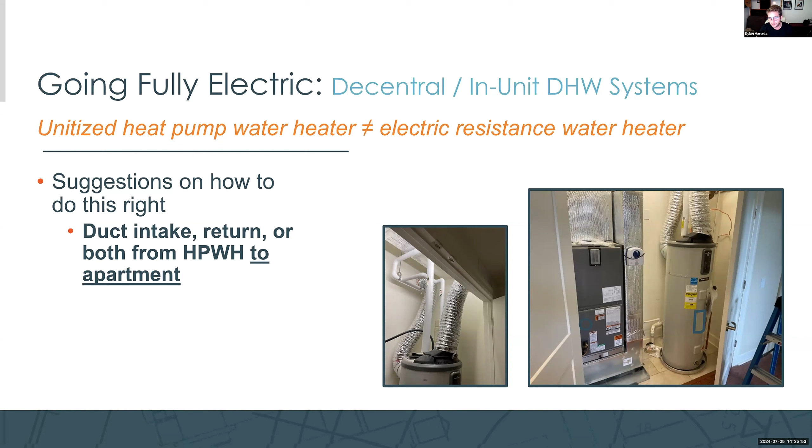...it's discharging air at 15 to 20 degrees colder than the natural air in the room. So you do not want to design that in a way that it's dumping that discharge air onto residents, or they might complain that it's cold, they're uncomfortable because of cold air drafts. But this is a good first step, is ducting the unit at least on one side, if not both sides, the supply and the intake and return, to help maximize efficiency.

So really, I think a great approach. And that, kind of the last thing I want to talk about is sound.

There's been a recent development of new products on the market that hit noise ratings less than 50 decibels, or dBA particularly. I've seen units get down to about 45 dBA.

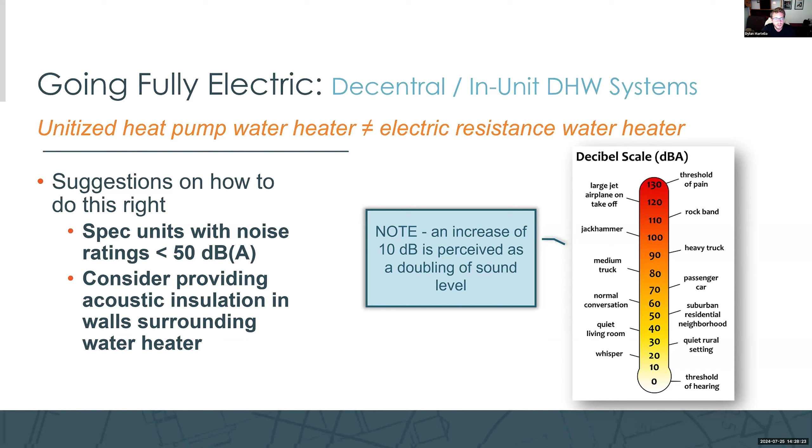All right, now what about central systems? A lot of times, especially in urban environments - I work a lot in New York City, Boston as well - central systems are really what we see most of. So how do we deal with these technical challenges?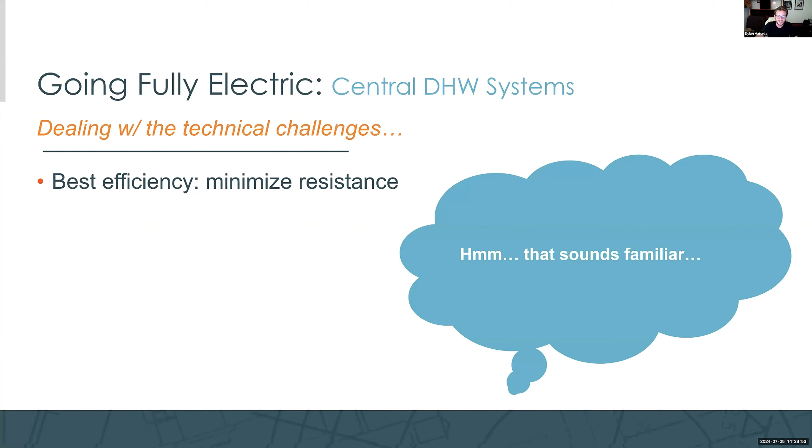With central domestic hot water systems, the key to maximizing efficiency is to minimize resistance. That sounds very familiar to what we just mentioned for decentral systems - we're dealing with the same issue, but in a different way. And really, what we're seeing with central domestic hot water heat pumps is that they're using

CO2 refrigerant for these units. And these units require cold inlet water temperature, anywhere from 50 to 80 degrees Fahrenheit, could be slightly outside that range. But in short, what they can't do is heat the water from the domestic recirc return, which comes back to the hot water system at about 100 degrees Fahrenheit.

So what happens is these units have what's called swing tanks, i.e. electric resistance swing tanks, and those are the tanks that essentially make up the recirculation losses. This is a technical challenge, one that I have not seen solved with any sort of innovative piping method or other solution yet, like additional heat recovery.

There's probably ways around it, but the reality is that the systems being designed and installed right now have these swing tanks. So we have to be super aware of how to minimize recirculation losses in these hot water pipes for central systems.

So how do we do that? Well, efficient recirculating pipe layout is one of the most important first steps. So what you're looking at here is a very Fred Flintstone diagram of a central hot water recirc system.

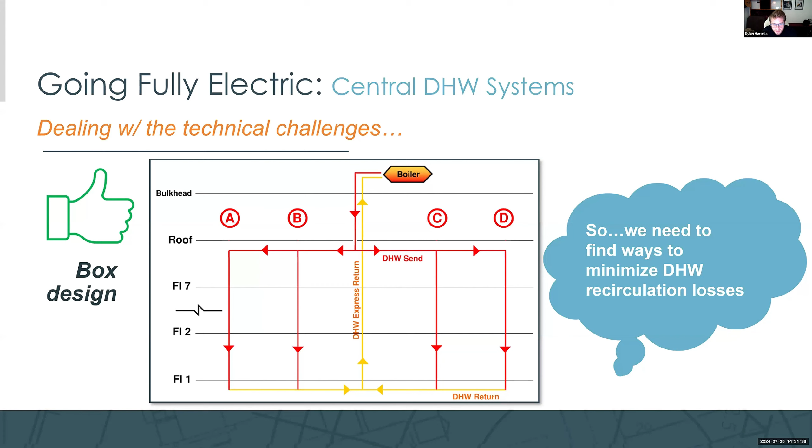This is not very good design. A way to do this better - keep your eye on the chart here when you see me change the slide - is to move one of those horizontal loops to the roof line, or vice versa depending on the vertical orientation. By doing this, it's called the box design. You're reducing about 40% of the piping for hot water recirculation, which means marked improvements in reducing recirculation losses.

So the way you do this is you have a horizontal loop, let's say at the roof line, distributing to the apartments. You run down the stack of apartments to your return loop on the first floor, and that collects back to your recirc express return, back to the heat pump water heater - saving on all those hot water return pipings in the riser clusters.

So this is one of the biggest ways to help reduce recirc. But right now, where we're at with buildings designing central domestic hot water systems, we have to really consider the electric resistance swing tanks and how to minimize recirc losses, because they can be up to 40% of the entire domestic hot water load if not dealt with properly.

All right, so the last couple things here I want to talk about are some new, exciting things, a lot of which we've chatted about already in the chat: going fully electric with space heating. One thing we're thinking about a lot here at Steven Winter Associates, and in the industry generally, is how do we do space heating with little to no central refrigerant piping, which can have potential implications with refrigerant leakage that, as many of us know, has drastic impacts on our climate with greenhouse gases.

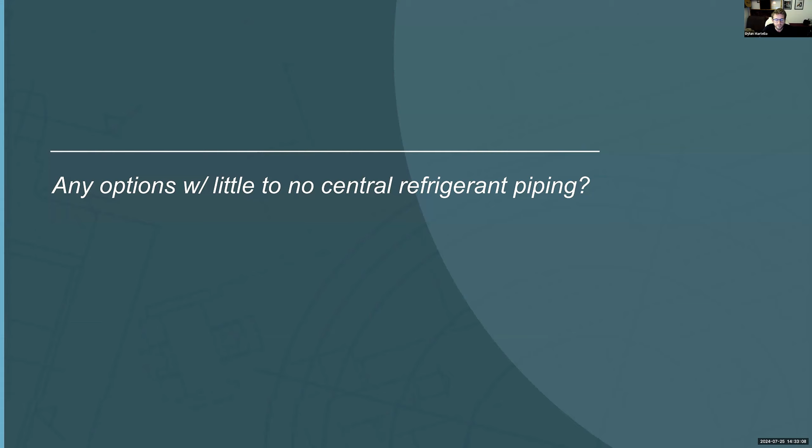So what are alternatives to central refrigerant-based systems? Well, one that we've gotten some exciting developments on is a packaged terminal heat pump. Right now we've been talking in the chat about Ice Air units and Ephoca. Those are really the two right now that we feel comfortable recommending on a project. But it's possible to find others.

You really just need to think about specifying airtight units that are insulated or thermally broken to help mitigate the two biggest drawbacks of PTHPs, which are that they're a thermal bridge in the envelope and they're not conventionally airtight. We're helping work with some manufacturers to achieve units that meet these levels of performance suitable for passive house, and we've gotten some great improvements over the last couple of years. We're starting to see projects that actually have these specified and starting to get installed as well. Really great developments there.

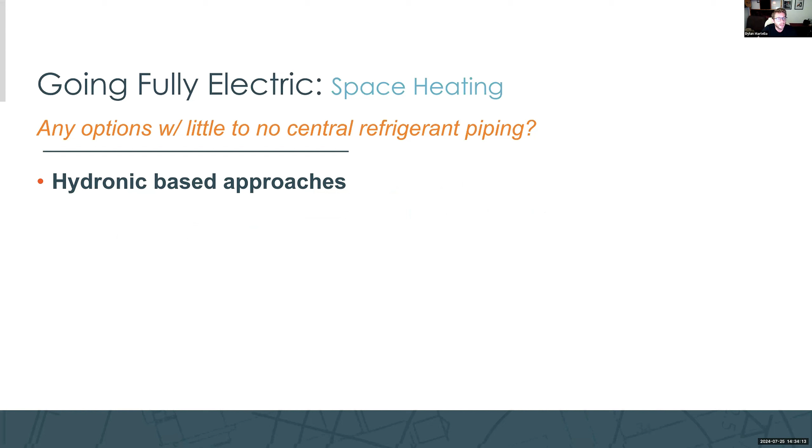And then lastly, hydronic-based approaches. So instead of having central refrigerant piping throughout the building, you have central water piping throughout the building. A couple of really key concepts here: in this approach you have a central plant, which could be an air-to-water heat pump or a geothermal well or loops. That central plant is combined with not only the hydronic loop itself, the piping for that, but also the terminal units. Some examples there: water source heat pumps, where you could do a mild temperature water loop.

Which is great—70 to 90 degrees Fahrenheit water running around your building, with water source heat pumps taking heat from that loop. You could do fan coil units, which would require a little bit warmer and cooler temperatures for heating and cooling. Hybrid fan coil units act as a fan coil in heating and as a heat pump, or an air conditioning unit essentially, in cooling.

But also it offers this ability to have a water-to-water heat pump tied to that hydronic loop, where you can use the energy stored in that water as heat for your domestic hot water system. And then you're not dealing with some of the challenges presented by air source heat pumps. Really exciting stuff—we're seeing projects implementing both of these approaches now. I wanted to highlight that these are happening, and we're seeing these developments move towards efficient electrification, one that is not only focused on high COPs, but also low embodied carbon and low carbon in general emitted by these buildings. So, exciting stuff.

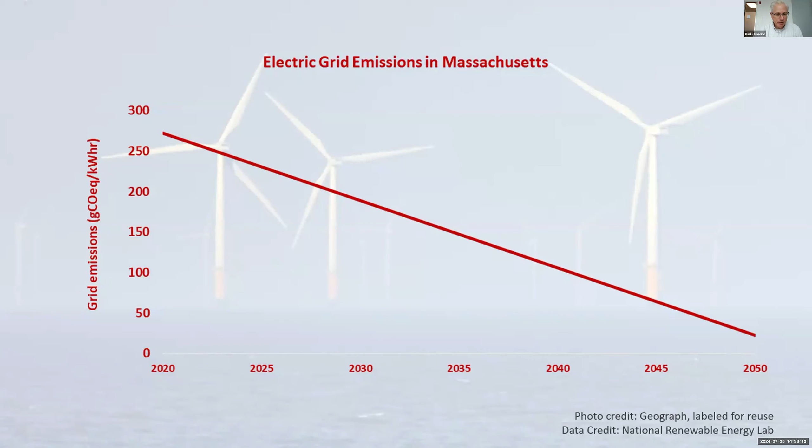So the convergence of those two things got all the policy folks looking to decarbonize states excited, because it allows a pathway to decarbonize space heating. Traditionally we've always been forced to use fossil fuels for space heating, but now we can get off fossil fuels and onto decarbonized electric by virtue of heat pumps. That's the backstory, and as a result, we're all rushing headlong towards electrify everything based on these two things.

But there is a bit of a hiccup here. The energy codes available for states across the US and provinces in Canada and other locations, these model codes that are adopted, are developed by IECC and ASHRAE. Those model codes are not very good at thermal performance of buildings.

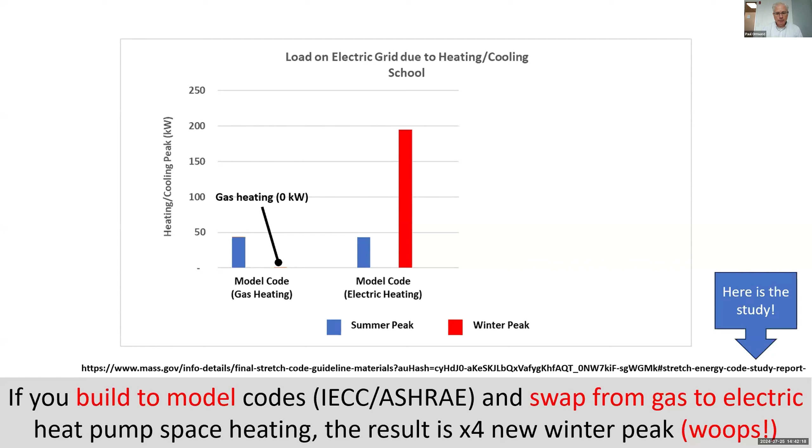This is going to be really expensive to modernize our grid to accommodate these very large new peak loads if you were to do it this way. So I consulted with our grid modernization people to ask them, how much is grid modernization costing us? That's things like new substations, new poles, new wires, new metering.

So I spent a number of years working in IECC on the committees.

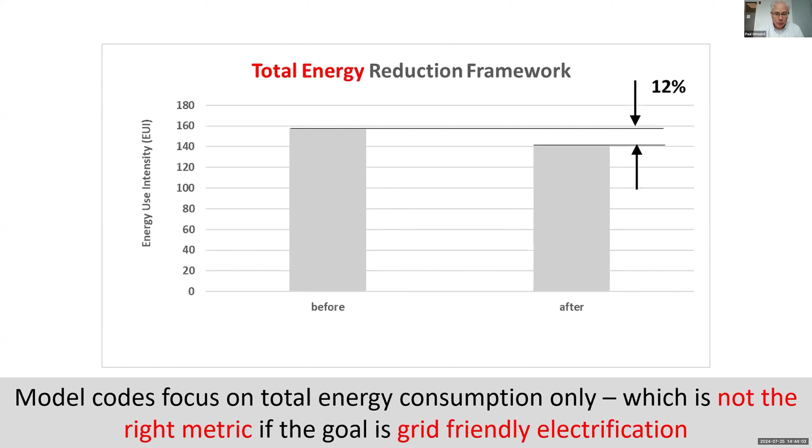The reason why IECC and ASHRAE are not very good at thermal performance is that everything in ASHRAE and IECC is done through the lens of how well it improves the total energy use of the building, the total EUI. So if someone proposes to improve the windows or wall performance, they'd ask how much that improved the overall EUI. That's the only metric used, so it doesn't really result in great thermal performance.

What matters in terms of grid friendliness is not only the total EUI, but even more important is the part of the total EUI that is space heating, because that's the thing you're swapping that used to be on gas and is now on electric.

What's terrific about Passive House is that for decades it's been all about addressing thermal performance of buildings. If we borrow the lessons learned from Passive House practice and apply them to our model codes, we find that we can really crush the space heating to oblivion, just like Passive House crushes space heating to oblivion.

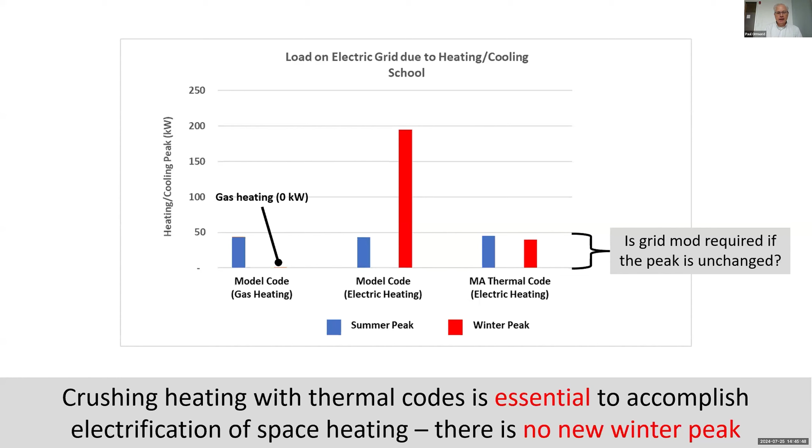So Passive House is the key, and thermal codes are the key to do electrification worldwide in all our cold climates without having to spend hundreds of billions of dollars, if you added up all the states, on grid modernization. My latest mantra in the office is that thermal codes and Passive House are grid modernization.

We think of grid modernization as new substations, new poles, new wires, right? But I'd like to expand that universe and think of Passive House and thermal codes as another way to achieve grid modernization, because we're reducing the demand of the building in the first place and then don't have to make those infrastructure changes in our wires. And we get better buildings, resilience, and comfort to boot, which we're not getting if we just spend it on substations.

A larger question that every state, country, and province should ask itself, the analysis that really needs to be done at the policy level, is what is less expensive? What's more cost effective? Is it better to incentivize Passive House, or is it better to buy a new substation? A substation costs $500 million. I want you to let that sink in and think about how much Passive House that could buy.

So it's really important to analyze these things globally. What are the particulars in the code that we need to amend from the model codes available from ASHRAE and IECC? It's these four things: envelope, air infiltration, ventilation energy recovery, and thermal bridges.

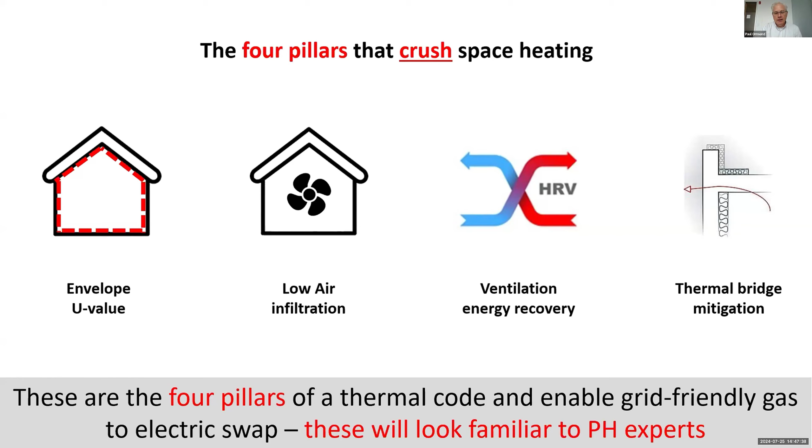It's really important to point out that IECC and ASHRAE, the model codes that all the states adopt, do everything except these four things. For example, in ASHRAE there's a pathway that allows you to trade off your envelope performance with no limit, again because the only metric is total energy use. So if you can show that you improved your lighting so much that it allows you to water down your envelope performance, that's allowed in our current model code. That's not going to help our grid modernization efforts.

Air infiltration is good news here - IECC 2021 did adopt much better air infiltration rules and testing. So that's maybe one thing making good progress there.

Ventilation energy recovery in the model codes has very low expectations for performance, lots of loopholes. The one that amazes me though is thermal bridge mitigation. IECC and ASHRAE still explicitly allow you to put a metal girt going from the inside of your building to the outside with no thermal break, and you don't have to do anything to consider that - it's actually explicitly allowed. It kind of boggles the mind, as people that have studied physics, that we're still allowing our buildings to ignore thermal bridges like that.

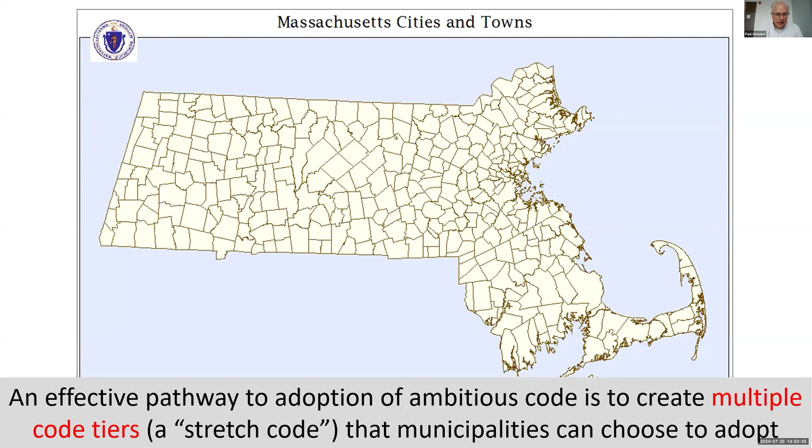For example, thermal code stuff in passive house. Then you say, if folks think that's too ambitious, it's totally up to the cities and towns to decide which tier they can be on. It becomes a really great way to introduce more ambitious stuff into your code.

Massachusetts has been at this for a while, so we happen to have 3 tiers. You don't have to have 3. Our base tier is just straight up model code with very few changes. Our second tier up is a stretch code, which is the model code plus the 4 thermal pillars. Then we have this specialized code, which is the same, but it adds passive house mandates for certain situations and some electrification. States can do it differently than these 3.

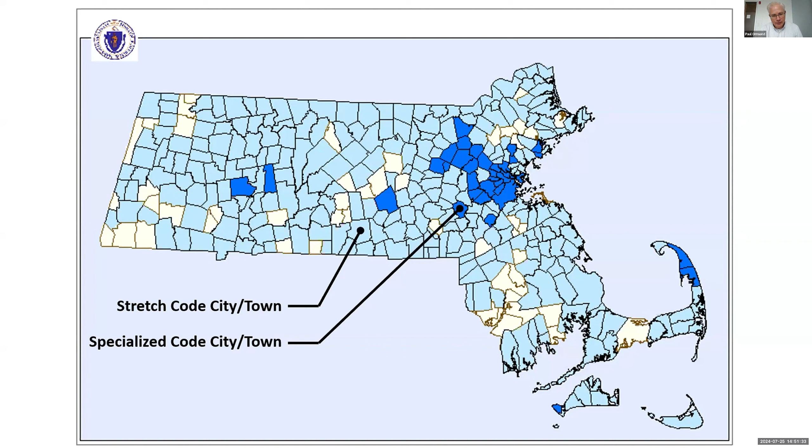We're very lucky, we've been at this for a while. There are very few places still on the base code; pretty much universally on at least the stretch code, and in many places now the specialized. So we have almost universal thermal codes here in Massachusetts, and that's really going to help our grid modernization.

But this was a model for a state that's just starting this—again, you don't have to have 3, maybe just have 2. Use that tactic: have a base code that is what people are used to, and then have a stretch code option for cities and towns to adopt that contains at least the 4 thermal pillars, and put passive house in there if you can—maybe as an option, or for limited types of buildings—but whatever you can do to adopt passive house and electrification.

Let me just end with a quick roundup. The headlong movement to electrify everything—if you do that without thermal codes, electrification of buildings is going to be very costly on the grid. It's a cost that can be easily avoided. The model codes that we use in the US are not grid friendly. They do not do thermal performance well, and that's going to create very expensive grid modernization costs.

So the solution is to add the 4 pillars as amendments when you adopt those codes, and then you'll have a thermal performance code. Whatever you can do to adopt passive house as much as possible, and make use of tiers to allow local jurisdictions to have a choice to adopt just the base code that people are used to, or opt into more ambitious stuff. That seems to be very effective.

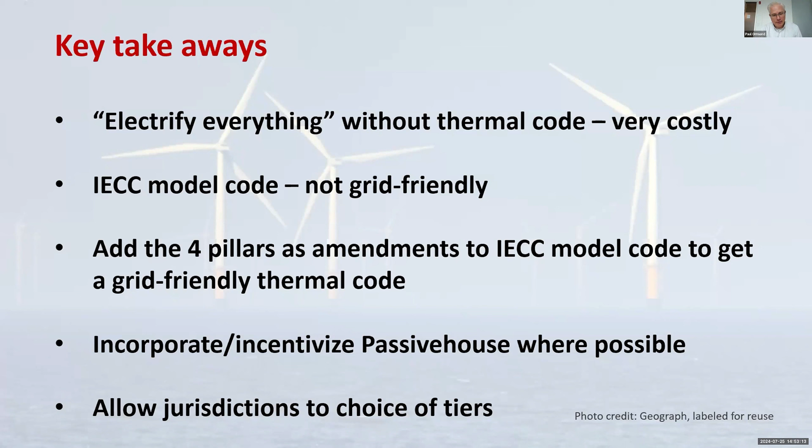I responded in the chat to Dylan, but we did have initially a problem with our swing tanks going on. All we had to do was turn the valve on the recirc line halfway, and it stopped happening and everything works perfectly. So all these things require a little commissioning, and I can't underestimate the importance of that, because I think about it every day. There's always something we can do—like our designers designed the building to ASHRAE standards, which requires 2 air changes per hour.

Passive house works fine at 1/3 air change per hour. So we've just gone in and cranked down all of the ventilation rates by 1/6, and we're seeing some savings there. It's a learning process for us.